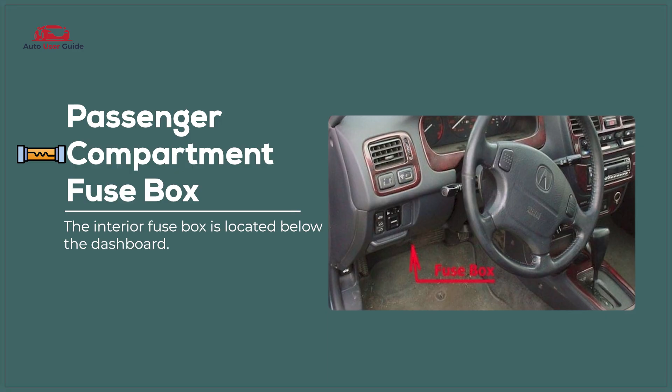Passenger compartment fuse box. In the 1997 to 2000 Acura EL, the passenger compartment fuse box manages key interior and body electrical circuits such as instrument cluster functions, interior lighting, power windows and locks, audio system, and various control switches, helping ensure stable operation of cabin electronics and safety features.

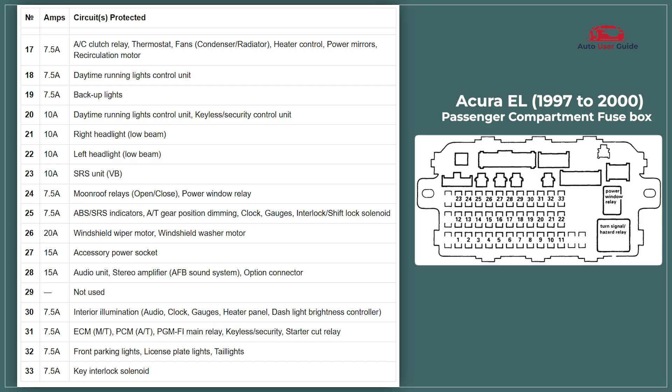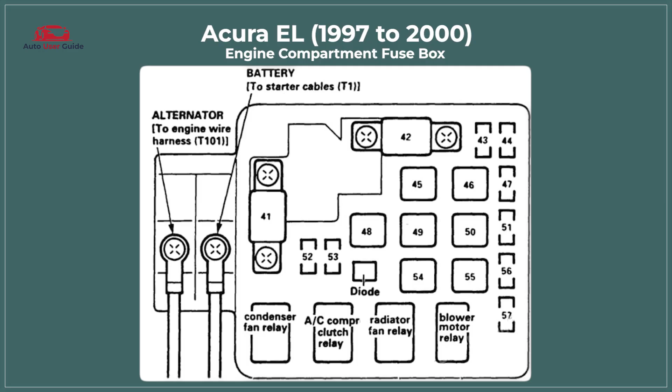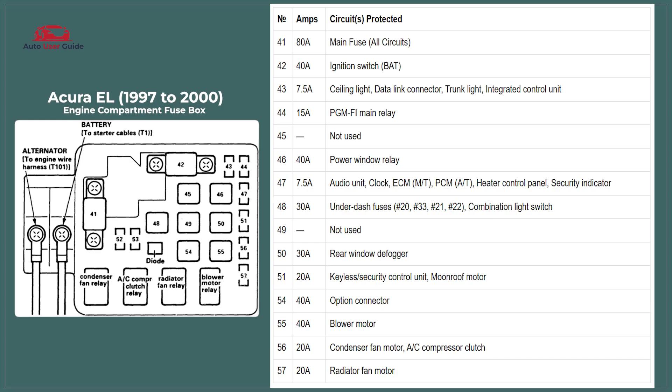Engine compartment fuse box. In the 1997 to 2000 Acura EL, the engine compartment fuse box distributes and protects power for essential systems including engine control functions, ignition, cooling fans, lighting circuits, and charging components, helping prevent electrical overloads and system failures.

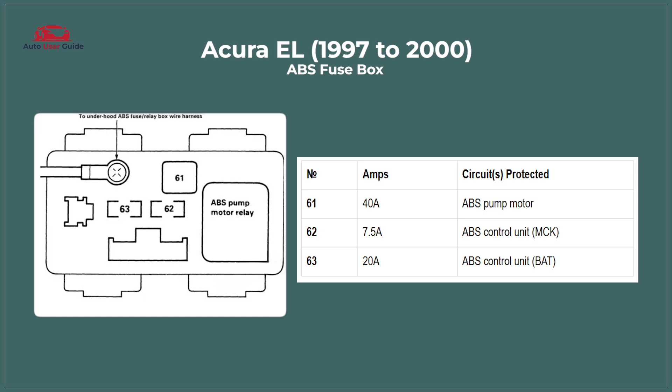Types of fuses: blade fuse, standard blade fuse, mini blade fuse, maxi blade fuse, micro 2 fuse, micro 3 fuse, J-case fuse.

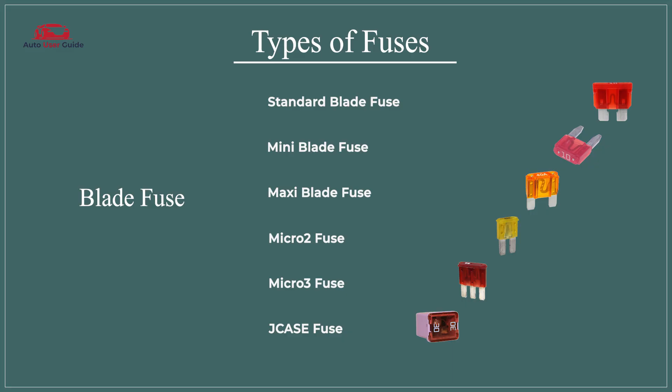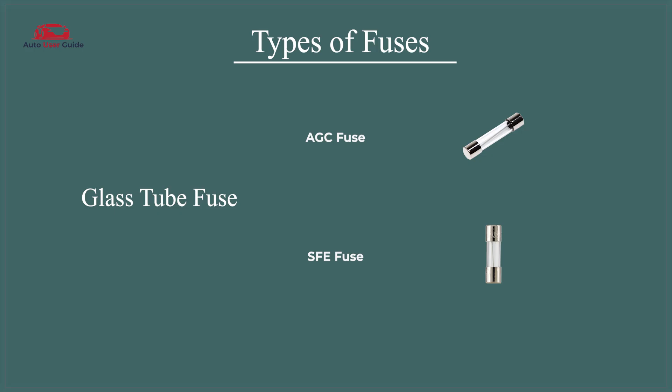Glass tube fuse, AGC fuse, SFE fuse. Ceramic fuse, Bosch fuse, DIN fuse.

PAL fuse, low profile PAL fuse, standard PAL fuse. Link fuse, mega fuse, high amperage link fuse.

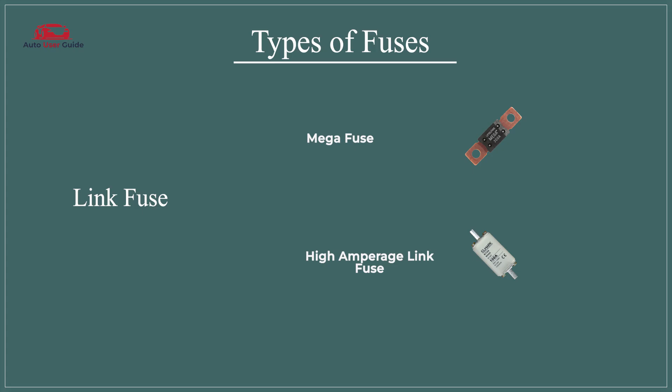Fuse conditions. Blown fuse: a blown fuse means it's no longer functioning and needs replacement, while a perfect fuse is in good working condition and performing as expected.

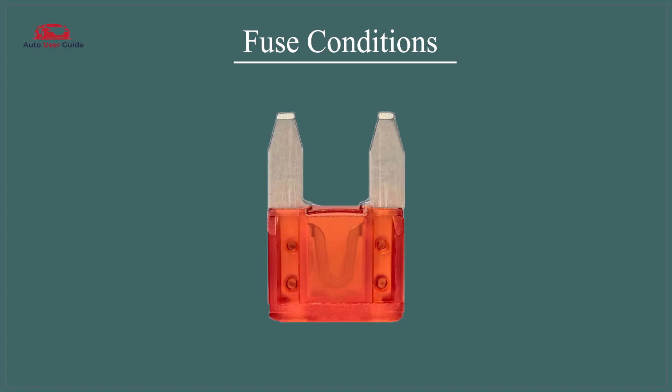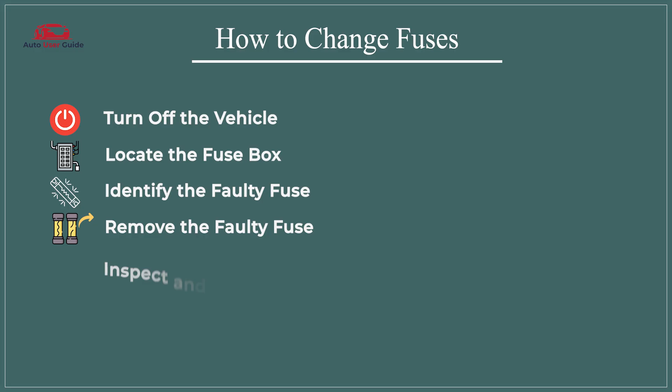How to change fuses: turn off the vehicle, locate the fuse box, identify the faulty fuse, remove the faulty fuse, inspect and obtain a replacement, install the new fuse, test the replacement.

Safety precautions: disconnect the battery, wear protective gear, use proper tools, check for correct amperage, avoid water exposure.